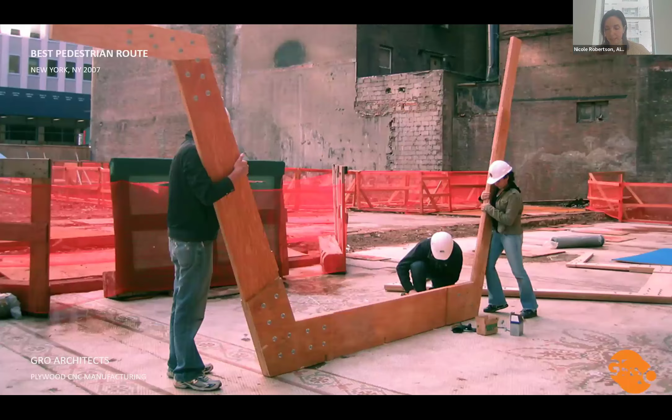Incidentally, this glorified sidewalk shed was assembled on the vacant ground of what would become the Fulton Transit Center, which incidentally I had worked at SOM on the competition for that project, which we did not win, but things kind of came full circle as we were assembling Best Pedestrian Route on that very site. And you can see in this photo the ornate tile floors of the previous structure, which had been demolished, which I believe was the Child's Restaurant building.

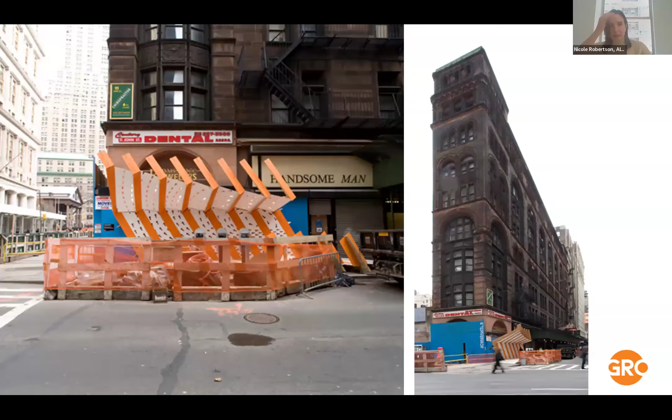Our project, Best Pedestrian Route, was an installation, temporary in nature, built adjacent to the Corbin Building, which is a famous historic landmark at the corner of Broadway and John Street in Lower Manhattan. This photo showcases the building prior to its restoration. It actually looks quite different now as the building facade was totally restored and Handsome Man is no longer there. Best Pedestrian Route was very popular amongst tourists and office workers and skateboarders alike.

Our project for Pretty Fab was envisioned as a prototype for sustainable urban infill housing, executed in precast insulated concrete panels for a client who ironically wanted to live off-grid while in the heart of Jersey City in 2009. We thought this impossible, but we were excited to take on the challenge and utilized manufacturing and somewhat non-standard construction systems to facilitate what was a novel project for us.

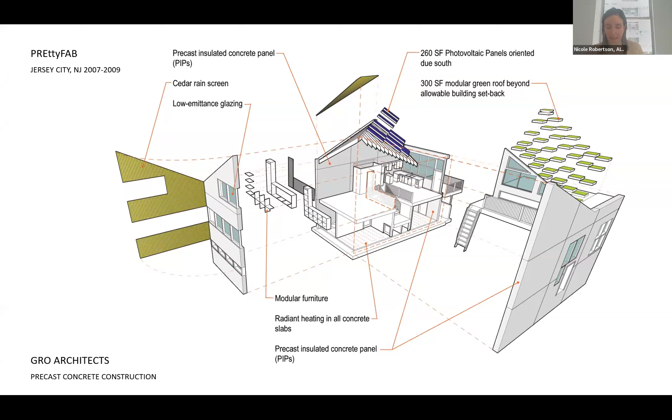We utilized a standardized precast panel system called Superior Wall with some customization and adaptation in the factory to create a super modest 1,200 square foot house for this client at an extremely low cost. A small 260 square foot PV system that is still in use to this day produces more power than is needed for the house, and the owner receives a rebate check every month.

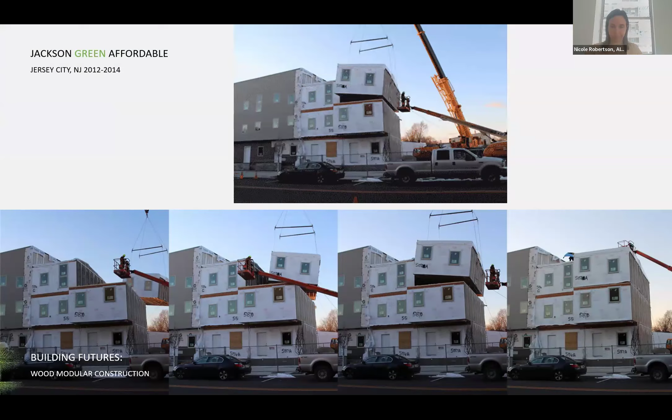And this led to our work at Jackson Green, which was an affordable housing project located in the MLK Hub district of Jersey City, which is adjacent now to the home of the construction office, right in the center of Jersey City. It was 22 single-family attached affordable townhomes that were constructed of wood modular boxes in 2014. And the completed project just around the corner from the MLK Hub.

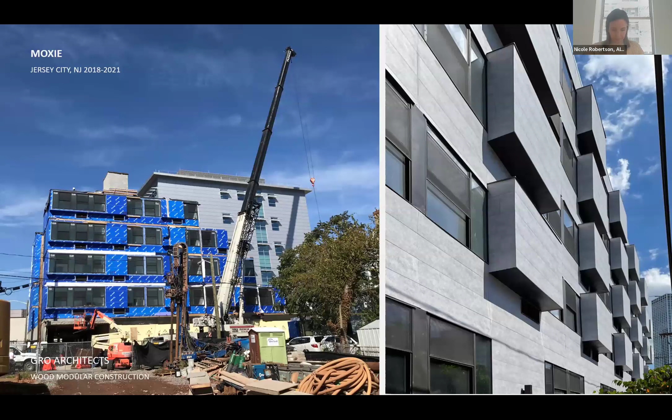Shortly after this, at Moxie over on Academy Street, we realized the construction of Moxie with 79 compact studio units. The project was actually built during the pandemic, so an instance where modular construction in this case really did save time, whereas perhaps in Jackson Green it didn't, but here it really did because we were able to keep construction moving off-site in the factory and minimize on-site presence.

It was our project around the corner from Moxie at 190 Academy Street, Nest Micro Housing, where our interest in density, sustainable living, and prefabrication technologies converged. Nest Micro Housing is a 38,000 square foot community containing 122 micro units. It is a progressive housing alternative for individuals seeking privacy, modern amenities, and economy while liberating them from stuff. Stuff in the sense of furniture that you don't need or extra accessories and things.

Nest's 220 square foot units are designed to be highly efficient with flexible furnishings, where different configurations for living, dining, or sleeping, and variations in between are possible. Residents enter the building through a cafe, which uniquely serves as a lounge and co-working space after building hours, and large amenity spaces, including a centrally located gym and game room, offer a kind of contrast to the small living spaces of the units themselves. And they promote community interaction and complement the compact units. Residents have access to a roof deck that provides views of Jersey City and Manhattan beyond.

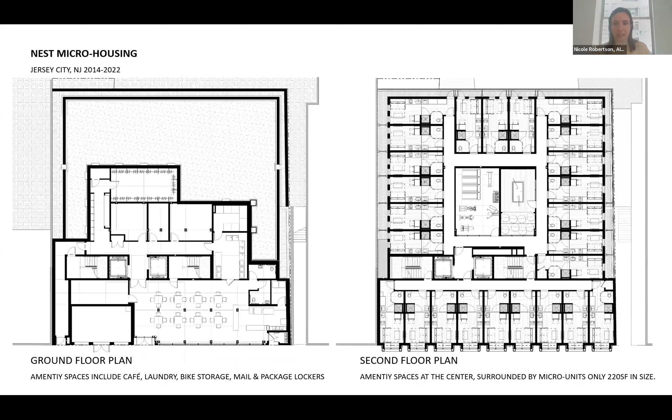And on the left-hand side is the ground floor plan, which really shows how we had to work with a limited amount of rock excavation and defined the perimeter of the ground floor. So with this limited floor area, we located, first you can see the cafe entrance, which was an unusual feature to the project, and then building amenities such as a very large bike storage room and mail and package services, as well as a laundry room that served as a kind of social space, bringing the community together.

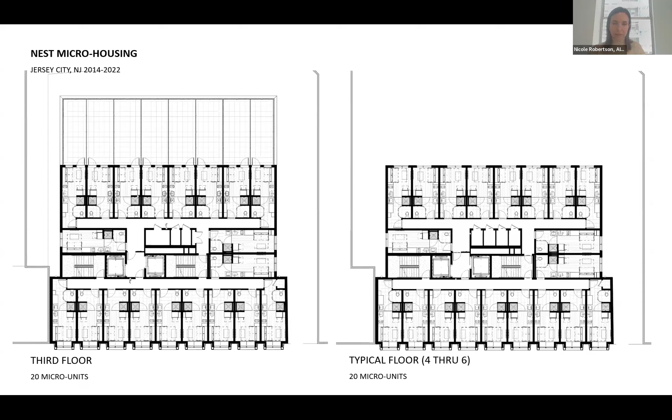The design of the micro unit was really a focus of our work and required intense study and collaboration with the New Jersey DCA as we looked to minimize the amount of living space and still comply with code. And of course, it had to be an ADA accessible unit. So all of the units are ADA accessible.

And what was key to this was organizing the unit into a wet and dry zone and deconstructing the typical ADA bathroom so that we were really looking at each of the fixtures of the bathroom individually complying with required clearances. The entrance is really through this wet zone from the common corridor into the unit space. And then the dry zone, which is closer to the windows, is where we've located the fold-down bed and sofa components.

And between these two spaces, wet and dry zone, the sink of the bathroom and the sink of the kitchen sort of walk that line between. So it's a very small space, but through flexible furnishings and the organization of the space, we were really able to make it work as a single occupancy unit. That was a really key factor in the design of this space.

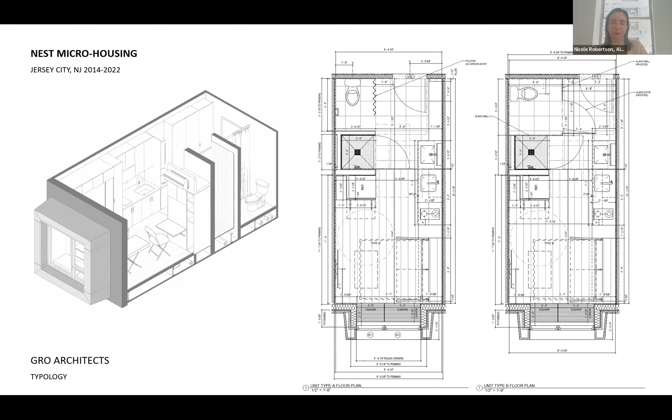Another key factor was the window boxes, which extended the space into the city and beyond, and served as an additional space to sit. This was a computer rendering, actually, once the unit was completed, that showed the extent of different elements that were captured in the space and the flexibility. We were able to come up with at least 5 transformations, pulling the desk down from the wall to accommodate working.

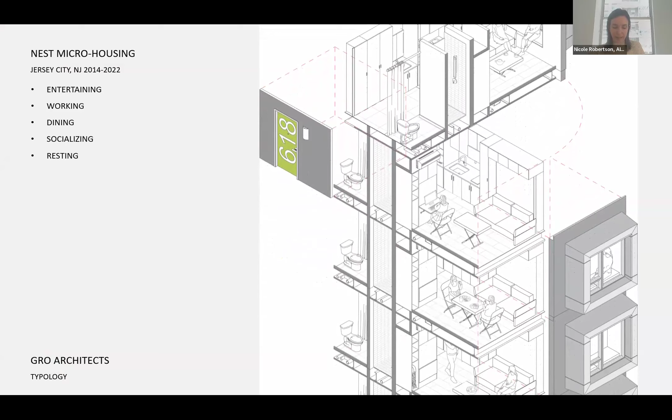The bed folds out over the sofa. The living area table has 3 positions to be used during the day. And so by expanding the functionality of the furnishings, we were able to increase the perception of the space. So in reality, yes, it's small, but through the flexibility of the furnishings, the sense of the space feels larger.

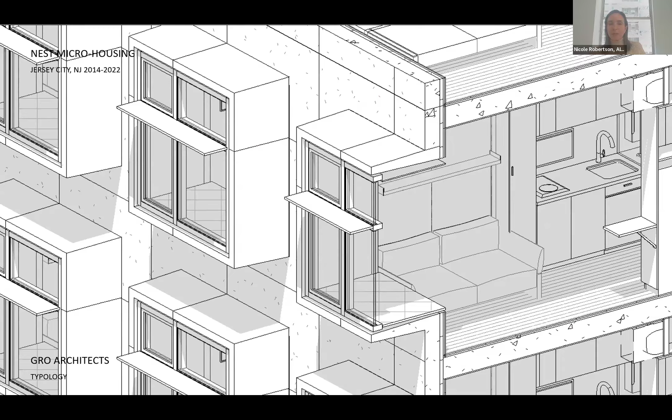This is an image cut through our Revit model very early on when we were initially conceiving of this as a concrete building. Later, we had aspirations of building this as a modular structure, carrying forward our work on prior projects, but ultimately it was constructed using a prefabricated frame wall system.

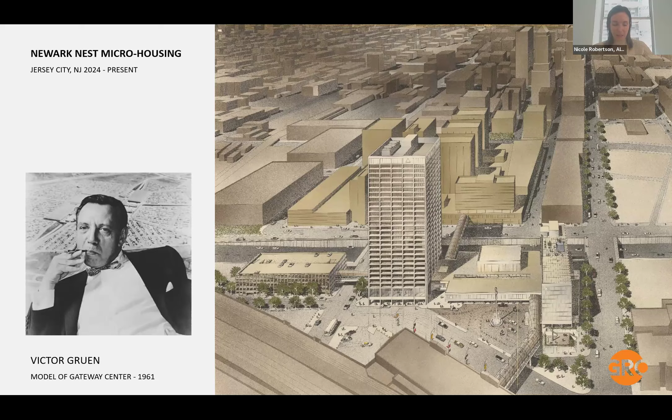So this project is in very early stages of development, but what we're looking at is, well, there's many projects right now in which office buildings are being converted into residential to address the housing crisis, which is on the East Coast and throughout the US. But in this instance, our client is looking at perhaps a typology of the hotel, which is in a way more closely suited to the needs of housing and micro housing in particular, in that the design of the floor plate here and the organization of amenities is more aligned with what we were doing in our micro housing project.

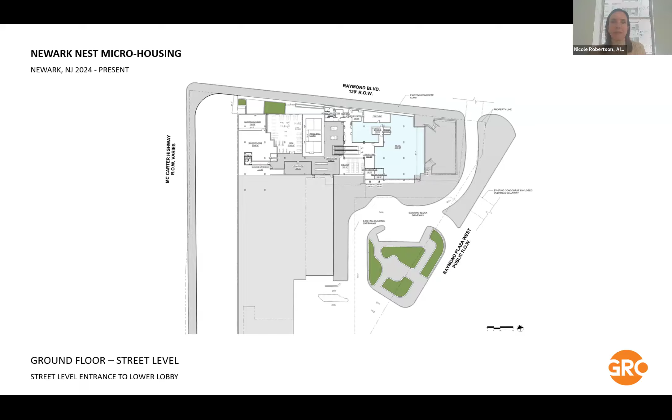So this is the ground level, street level here, just showing what will occur with the main entrance, maintaining retail at the base shaded in blue, but a street level lobby, which then by escalator provides access up to a second floor lobby. But on this level, the ballroom will be converted into recreational spaces, pickleball, pool tables, a gym, all of the amenities that we had.

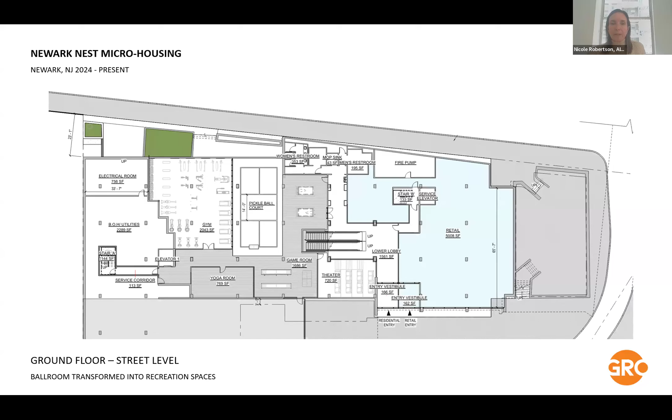And this is a zoomed in view of that. So amenities are proportionally much greater than what you would find in a typical kind of multifamily structure with 264 dwelling units. This is a lot of amenity space.

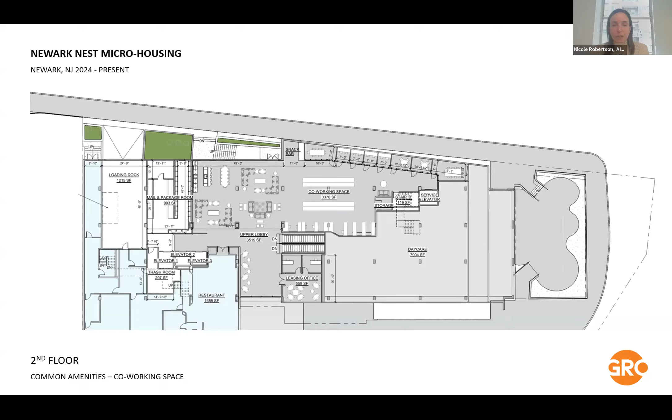And on the second floor, we see the bridge connection to Newark Penn Station. And the amenities on this level, again, doing something innovative similar to what we did at Jersey City Nest, where we're entering through a co-working space and lounge into the residential building. And then we have other amenities supporting the project residents above.

So this is a floor plan of the existing hotel showing 34 rooms on each floor. Only 4% of them are required to be ADA accessible. So that was really the challenge for us. So in some sense, the exterior envelope, the precast or the cast in place concrete envelope could stay, but the internal organization of the corridors and units had to be adjusted.

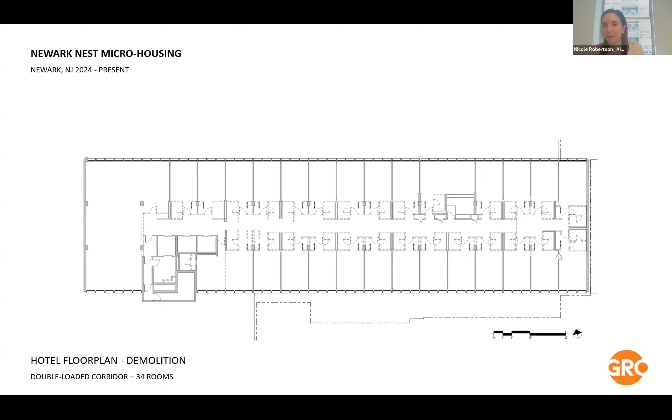So we've looked at how we can basically keep as much as possible of the existing building and existing demising walls, exterior facade, even the location of plumbing, but that we need to remove and alter the corridors and bathrooms so that the whole building can be made ADA accessible, which we've done with a kind of initial schematic layout of how this could work in the units.

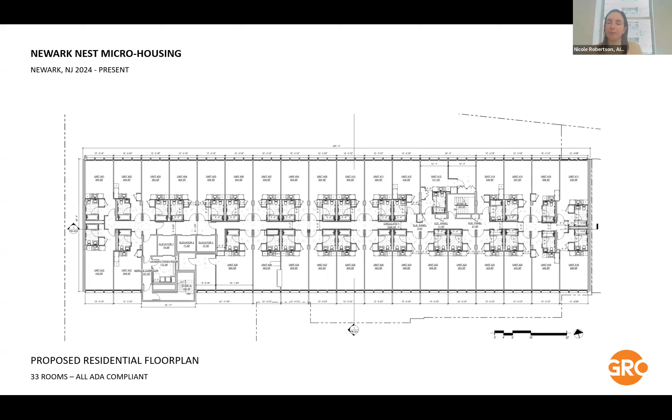Again, really prioritizing how we could keep as much as possible of plumbing risers and existing walls to minimize the amount of disruption and really the amount of material waste, the cost of the project, all of these factors that are driving more and more developers towards adaptive reuse as a solution.

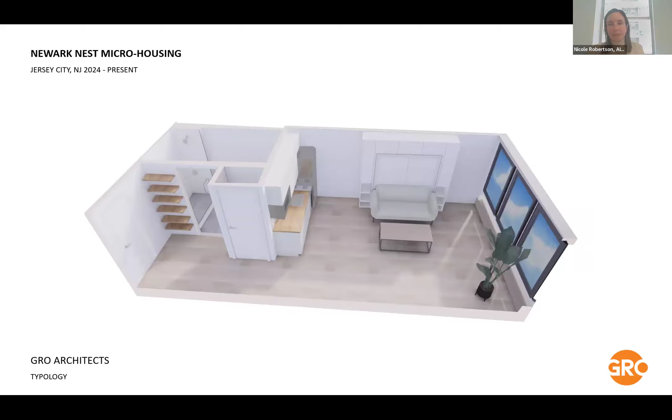And this is a quick sketch of what those unit interiors might look like. You can see that they're a little larger than our project at Nest, which was only 220 square feet. These are a little bit larger, closer to 300 square feet with a full ADA bathroom enclosed. So our thinking on microhousing has evolved since that project. And we're looking forward to continuing on this one.

This takes me to the next project I'll talk about, a restoration to an existing warehouse in Jersey City, which was for the A&P Grocery, which was a center of innovation in 1908. It was the first commercial bakery equipped with horse ramps, a loading dock for delivery trucks, on-site refrigeration, and an early reinforced concrete industrial warehouse. At the time, it was a building that enabled the future of the American grocery store.

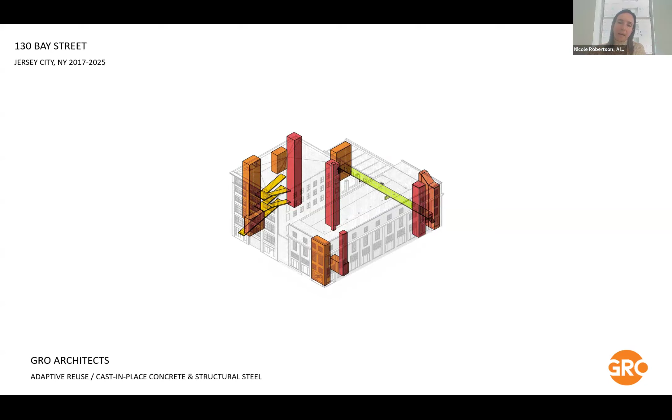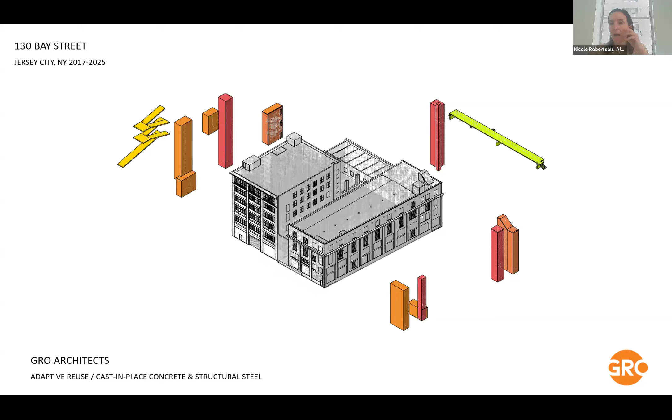But all of these elements being so kind of dispersed within the building, while they worked really well for an industrial bakery at the time, when we had to consider this as a new commercial building, we really had to rethink how circulation could work. And we looked at this two-story structure that was kind of connecting the two warehouses and affirmed with the Historic Preservation Commission that it was not a significant structure.

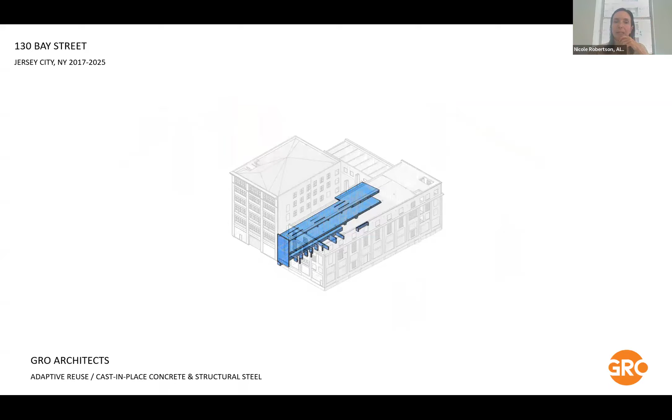So they actually allowed us to remove it, because it was really kind of in an optimal spot for connection, but itself was obstructing our ability to do that.

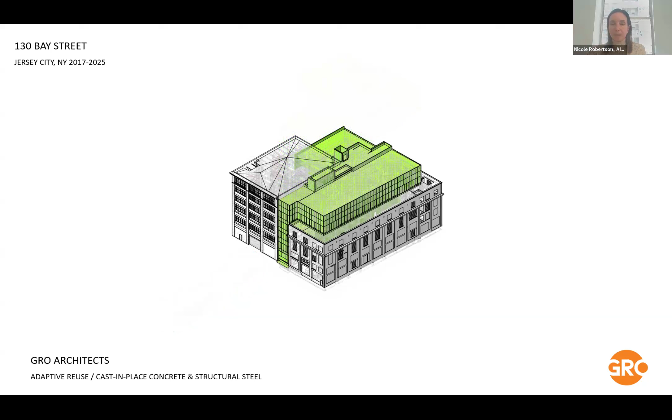And this is where our intervention, highlighted in green here, is the addition that we inserted to concentrate the circulation elements at this central core and add a double height addition to what we call the yellow building and a fourth floor addition on the rear side of the building.

And you can see that the addition is pulled back on the facade on Bay Street by a couple of feet so that it is really kind of secondary to the existing historic structure. And it's also set back on the fourth floor over the yellow warehouse so that it's not dominating the view of the building.

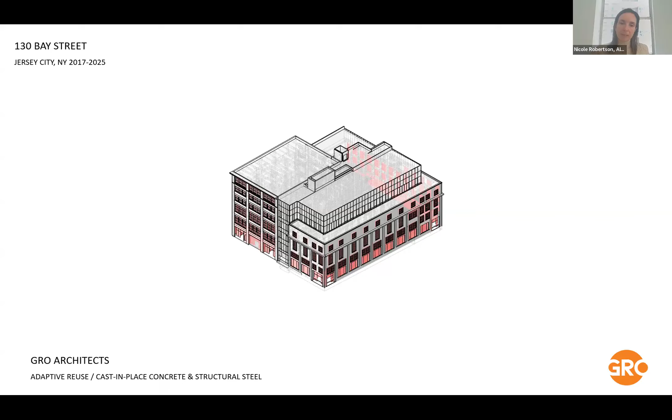And then we also restored all of the existing windows and reopened existing openings that had been filled and created new openings. With the removal of the stairs from the corners, we were able to create new windows, which followed the rhythm of the existing windows, but were actually new. And the facades were totally restored as part of this.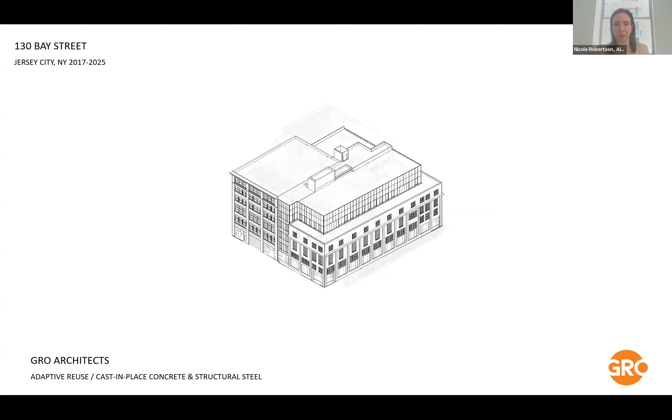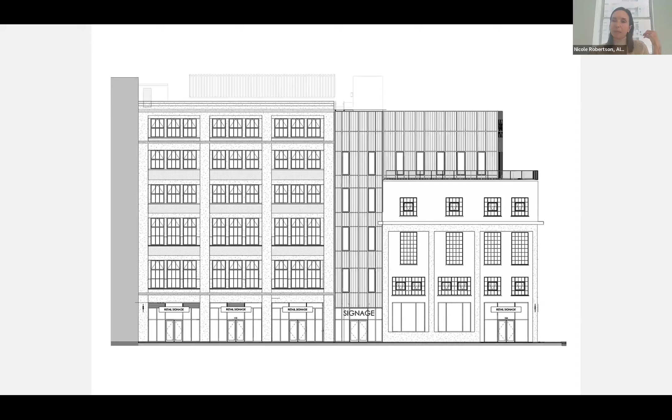And this section view shows this idea clearly where you can see the offset floors. So the elevator opens on both sides and kind of mediates that relationship. And then we have a few moments where we connect.

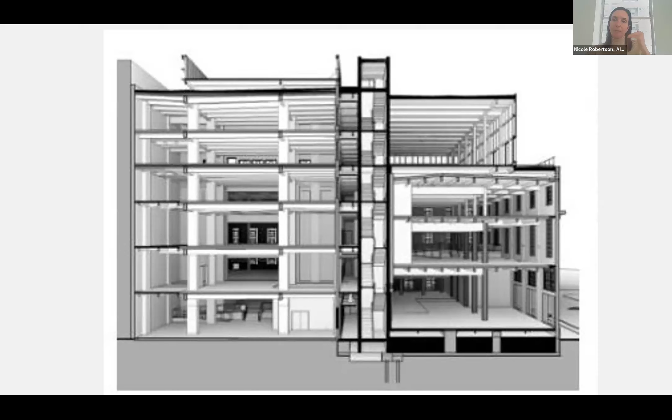The loading dock we demolished and rebuilt, and that was really to introduce ADA accessibility to the building, because previously it could be accessed by horse ramp and horses, but the building really didn't accommodate people very well. So part of the evolution of the loading dock was for it to allow people to access the entire first floor, and now the entire building is ADA accessible, which we thought was really essential to making it a successful project.

So the solid to void ratio, which is one that we often talk about when working on historic preservation projects, that's really important to maintain. So we were able to keep certain structural features of the facade that were apparent on the street in the project. So this was a very, very early rendering of the project when things were kind of simple.

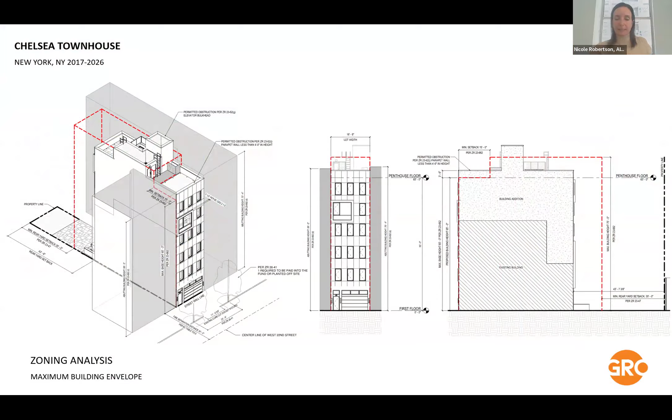And a zoning analysis showed us that we were going to keep this as an as-of-right project. The red dotted line highlights the max building envelope and our base building height at 65 feet with a small parapet. And the image on the right-hand side showed the relationship between the building addition and the existing building, which we would keep.

And it was important to the owner to keep the existing structure, I think largely for, one, economic factors, that this would be a more cost-effective way to execute the project. And also a kind of sustainable agenda, that we would not be wasting material and demolishing. And there may have been a time factor as well.

And this is a diagram that we created as part of our permit set where we analyzed the existing structure that we were keeping, which is hatched in the diagonal, with new structural infill that we had to insert to infill the opening of the previous stair or certain areas of floor, and then the new addition.

But it was super important that we needed to stay below a threshold of 50% to maintain this as an alteration rather than a new building under New York City Building Code, because otherwise we would have triggered a host of other requirements.

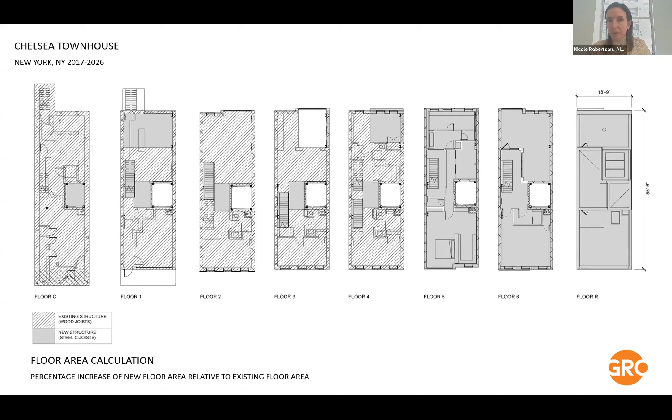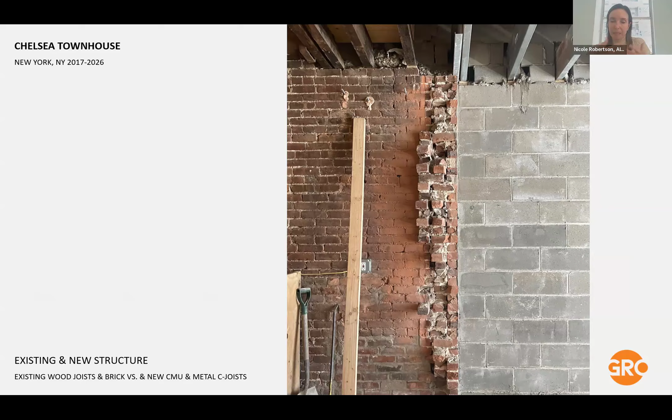And so this was a really fascinating project as we were juxtaposing antique wood joists and brick masonry with new steel C joists and CMU block. Actually, most of the interfaces weren't quite this clean. This was probably the cleanest image I could find of these conditions coming together, because it really was an interlocking of new and old. And then we had instances where we were keeping the existing brick masonry, but then we had areas where we were building new but needed continuity.

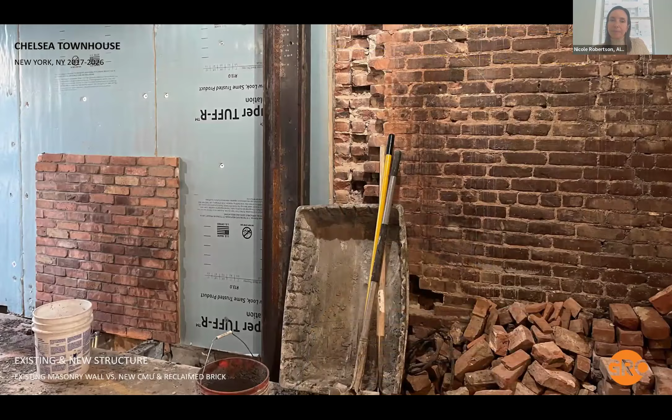And so we were salvaging brick from the project, having it cut down, and then laying it out on the floor to make sure that we had the variation and consistency we were looking for. And this is a mock-up again showing the relationship between new and old construction, where we were preserving the existing brick and then building mock-ups to show how we were going to create continuity at moments with the new structure.

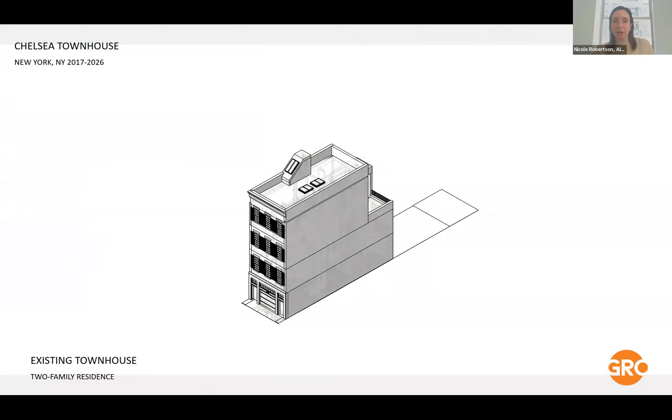The existing carriage house started off as a 4-story building. And again, this addition was very simple initially, except that the owner had a strong interest in skate culture and specifically in having concrete floors throughout the project. So not only would the facade unify new and old, but all of the floors were to receive the same treatment, which would be concrete floors. And these weren't ornamental concrete floors. These would be real 2.5-inch thick concrete floors. So that required us to introduce a great deal of steel into the project.

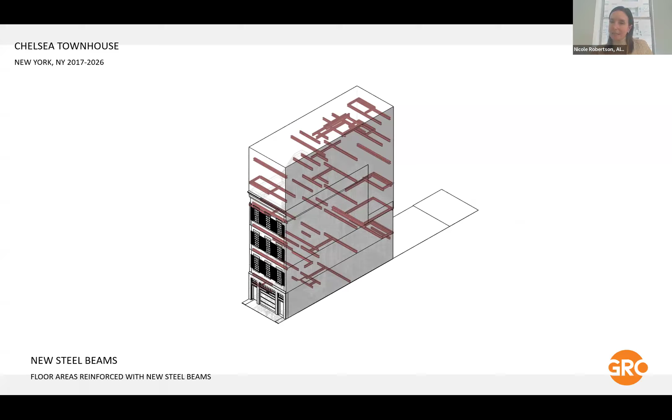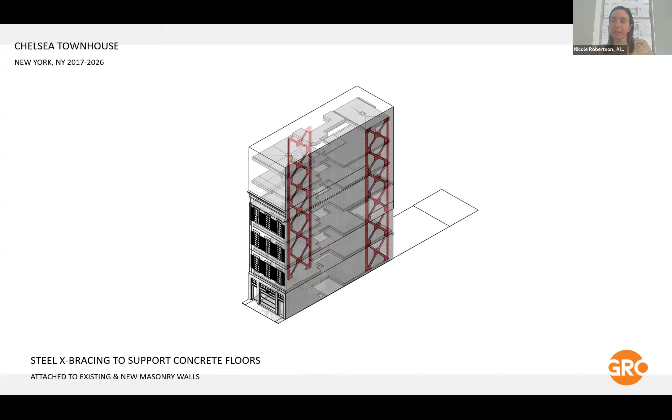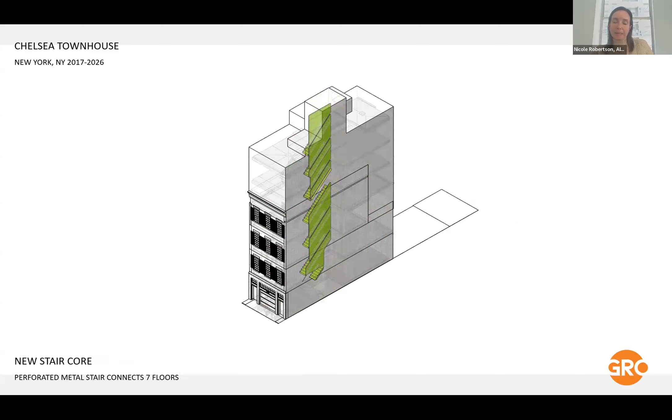And the yellow here shows the way that concrete floors were overlaid on top of both new and existing floor structure. And in order to support these concrete floors, we had to create steel cross bracing that would serve to reinforce and support not only the existing structure, but the new structure above. And we created a new elevator shaft as well that utilized steel cross bracing to support it, and a new stair that organized the interior, which was previously a maze of circulation.

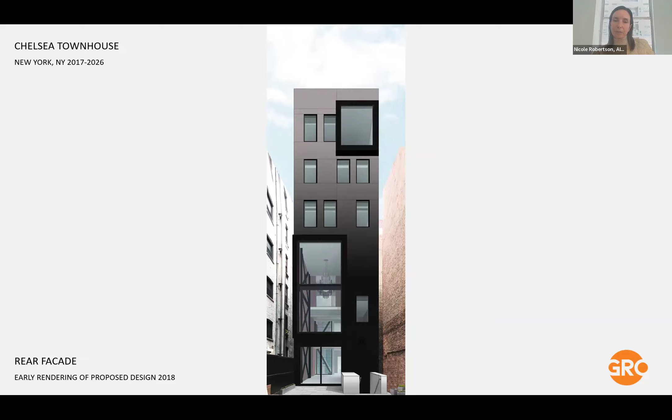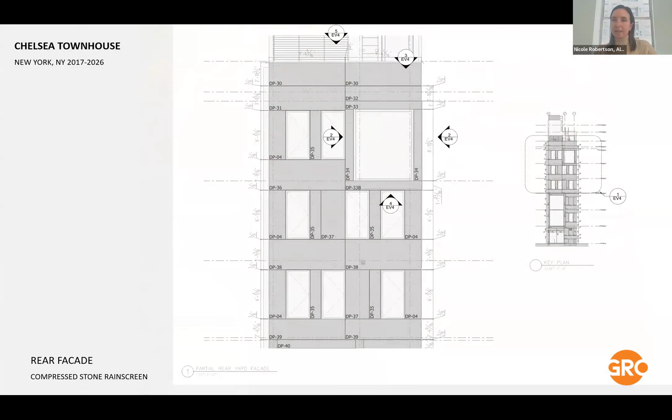And this was all fabricated at the Cosentino factory in Spain. It took a great deal of research to work through what was available in their palette of existing compressed stone finishes, and how we could take those. They work with stone particles and basically 3D print it to create the panels, but it can all be customized. So we looked at a number of iterations of this to create the panels, and a very careful review of the shop drawings to study the attachment method to the new and old, as this system had to totally adjust to the variable conditions underneath.